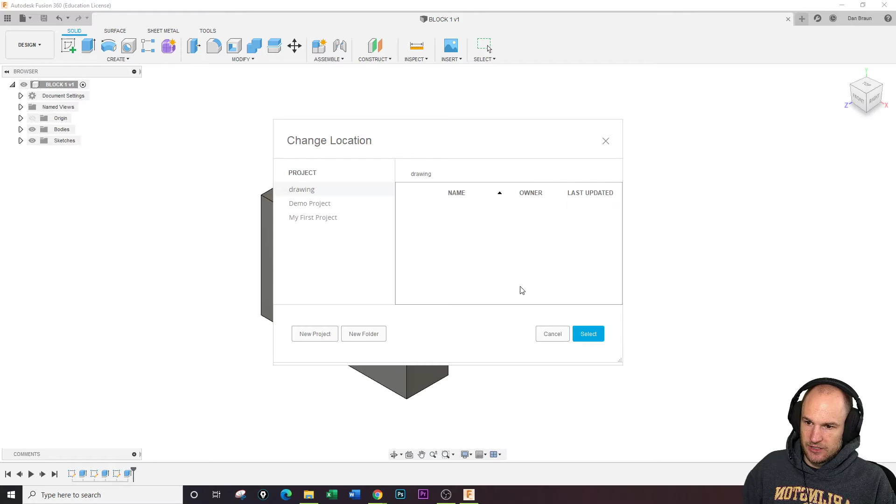So, you should have a new project folder or whatever in here. So you could say Unit 7, new folder or whatever. And then you go select the files, and it'll be this Arlington file. I may adjust this a little bit as time goes on before I put it up, but basically that's what you've got going. So I got that.

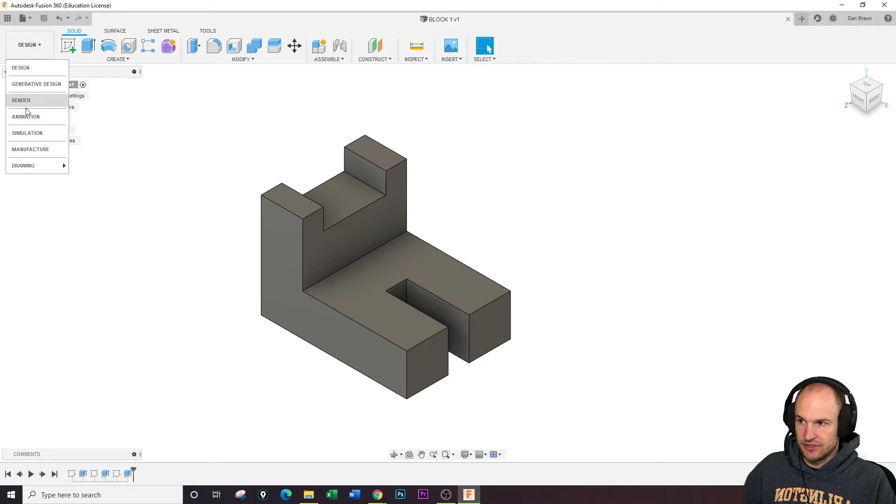I'm going to go design, drawing, from design, and I'm going to click my Arlington template, which you may have to browse for. If you go to browse, there it is in drawing. So you notice it is ASME as the standards, and what that means is it's going to be like in English, and you're going to have some issues with that.

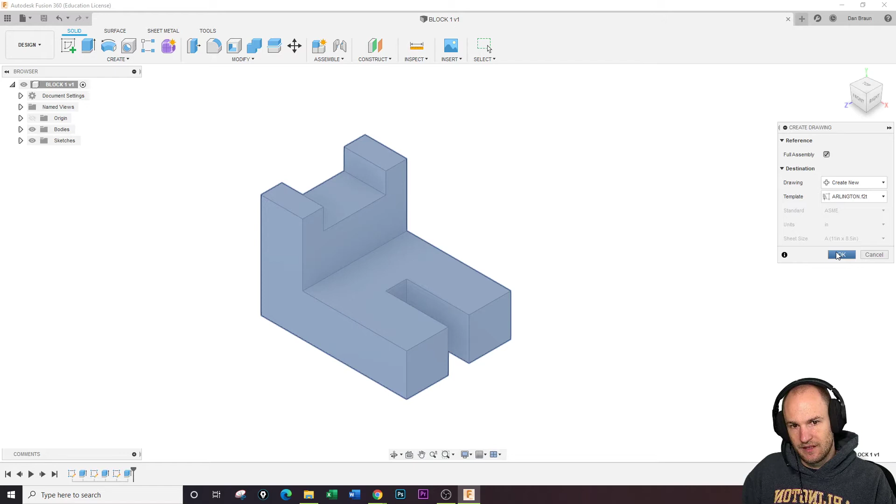So one issue is, for the life of me, I've been through this software, I've checked online, I cannot figure out how to change it from unidirectional dimensions to aligned dimensions, but that's okay. We're just going to say you do not have to change if you're using Fusion your dimensions to an aligned dimension set. You can keep it as unidirectional. Everything else I think I've got a handle on, but that is still something I'm trying to figure out. And if any of you figures out how to do it, let me know.

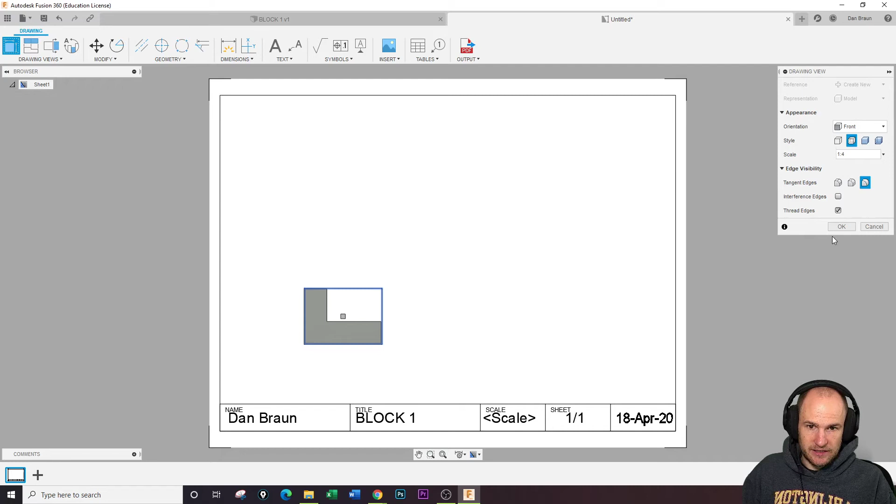Okay, so anyway, we've got our block here, and you drop it where you want the front view to go, and then unlike previous drawings that we would do in Inventor where you could project like this, we just click OK. Then we go to our drawing and we project the view up and over and in the top corner. And this is how you used to have to do it in Inventor, but they've since gotten better. And then we're going to change this to a dark object.

So once that's done, we can actually start dimensioning. And your dimension tools are over here. They're a little different than they were in regular Autodesk Inventor, but for the most part, they're the same. One of the big differences is if you want to do like a baseline or a chain, you have to put a dimension down first, and then you have to reference that dimension, like so. But that's pretty easy to do.

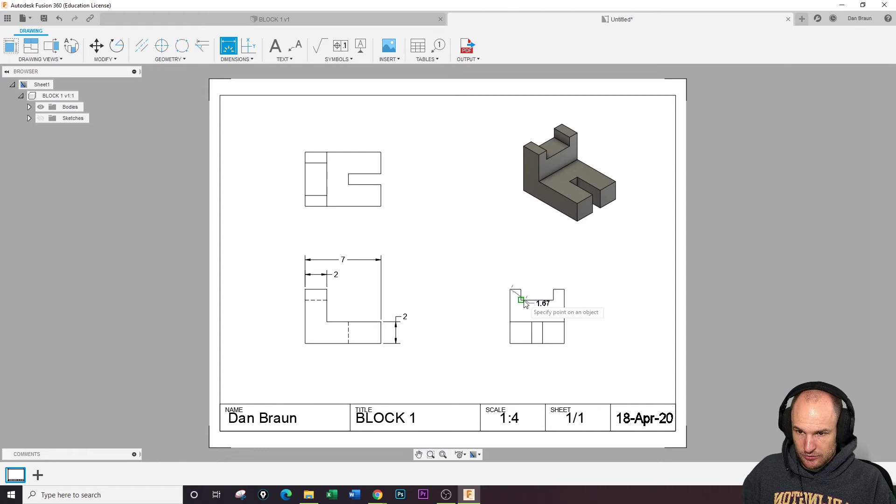So we've got this dimension in here. We got a couple other ways we can do this. As I already illustrated in my other video that takes you through with all the answers, I'm going to go put this one here. I'm going to go over here to the side, and I'm going to do this one on the contour coming out. I'm going to do my overall height here. Really, a height would probably be better here because it has the contour, so I'm going to stick with that. So I'll do my overall.

I'm going to just tweak this 2 here a little because it looks like it was saying 25 there and I didn't like that. So 2.5. Other dimensions I need, this I'm going to do here. And I need the gap, so I'm just going to baseline the rest of this. Go down here, I'm going to baseline the rest of this. So starting here, I'm going to go here, and I'm going to go here. So that finishes that one off.

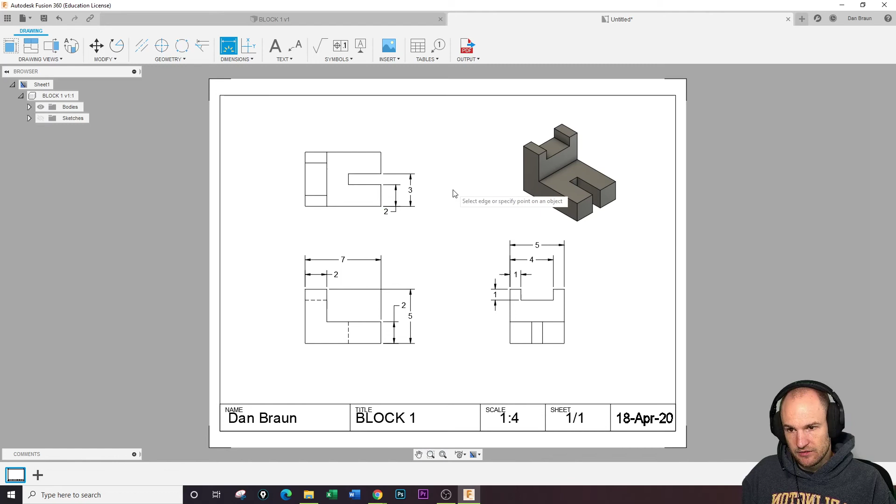And then I need a few more dimensions. I need this guy right here. 2, and I need from here to here because we're doing baseline 3. And this is covered. So I think that covers all of them. So this is how you would dimension. It's very similar to Inventor. It just, as I've shown, there's a lot less you can do and modify.

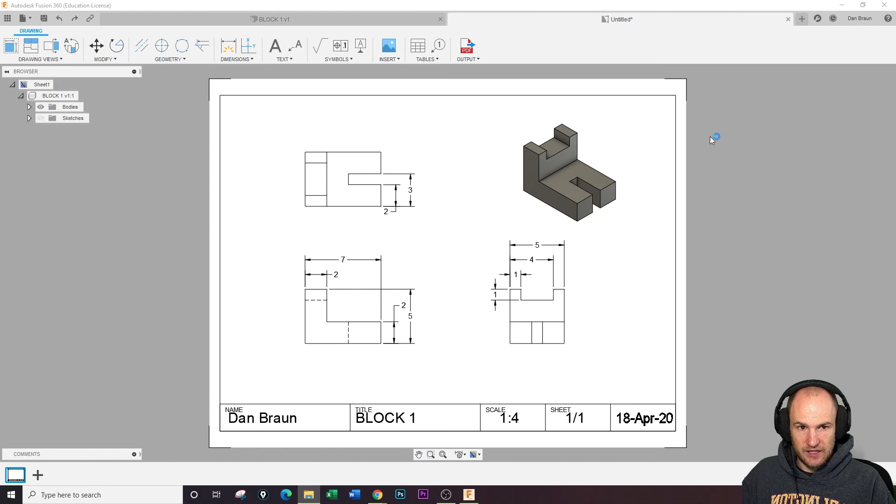And when you're ready, you can go to Output, PDF, one sheet or all sheets. So like we're just doing the one sheet right here. Line weights, click OK. It'll make a PDF and download, and let's see if it opens up for me. Did not, so I'm just going to go grab that so I can show you. And then you would be able to upload this into Google Classroom, which is great.

So if you do not have the ability to use Inventor, Fusion is kind of a workaround. I'm going to be doing videos on both. I'm not going to take you through all of the dimensioning steps on this because I've already done an Inventor one and they are similar. The one thing is you do not have to do the aligned if you're using Fusion.